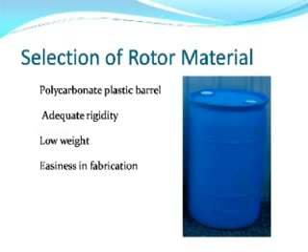The working principle of my project is the Magnus effect, which means that a rotor, a round cylinder, is rotated in a medium; here the medium is wind. One side of the cylinder assists the flow of the wind, so there the velocity increases. As a result, the pressure decreases, which depends upon Bernoulli's principle.

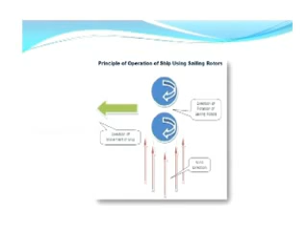On the other side, the velocity decreases because the rotation of the cylinder acts as a hindrance to the motion of the wind. So there the velocity decreases, and as a result the pressure increases. So a pressure difference is created on the two sides of the cylinder, and a lift force is generated due to this pressure difference. This lift force tries to move the boat, which increases the speed of the boat.

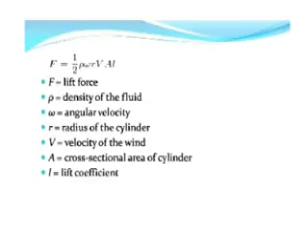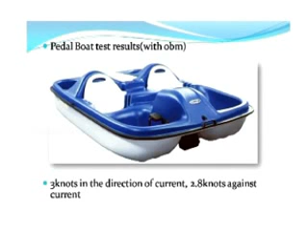We kept two or three selection criteria for the hull. First is the stability of the hull, second is the hydrodynamic shape of the hull, and third is the resistance due to the hull. For the pedal boat, which we selected first, one advantage is that it has good stability due to the waterplane area. The disadvantages are that its freeboard is very less, and the hydrodynamic shape of this pedal boat is against our design criteria.

So we went for another boat, an FRP fishing boat, a fiber reinforced plastic fishing boat. From the tests conducted on this FRP boat, we found that it is very suitable for our project because it has very good hydrodynamic characteristics. Also the stability of this FRP boat is very good. So we selected this as our hull.

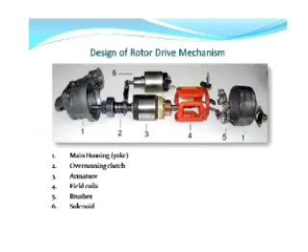The second one is the design of our rotor. It mainly consists of various dimensions of the rotor, that is the length of the rotor, the diameter of the rotor, and the speed of rotation needed for the generation of this lift force. From the various calculations, we obtained the length of the rotor as 3 meters, the diameter as 0.3 meters, and the rotational speed is around 650 rpm.

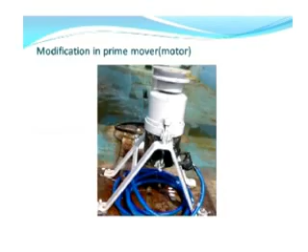In order to rotate this rotor, we selected the prime mover as a DC series motor. It has various advantages like very high starting torque, which is one of the most important characteristics of a DC series motor. We also selected this DC motor because we can reverse the rotation of the rotor.

If wind is blowing from one side, we rotate it in one direction, and if the wind is blowing from the other direction, we can reverse the rotation so that the lift is in the same direction. So we got higher maneuverability for this boat.

The merits associated with Blue Wasp, our project, are reduced fuel consumption, better utilization of wind energy than sails, reduced emission of greenhouse gases, better maneuverability achieved by using the Flettner rotors, and a larger angle of the wind can be utilized.

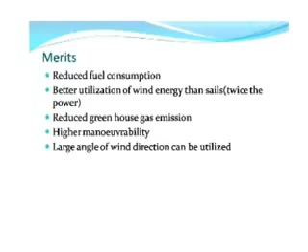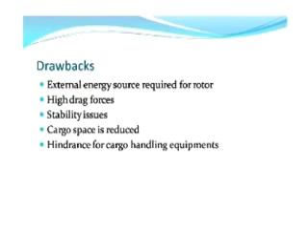If these Flettner rotors are implemented in ships, certain drawbacks are there. The main thing is the stability issues concerned, and also the cargo spaces are reduced when we implement such a large rotor onto the ship.

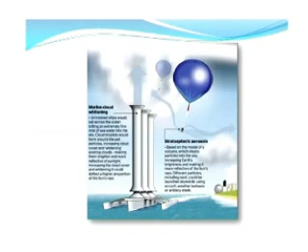A future concept associated with the project is known as the cloud albedo method. In this concept, if we made certain modifications to our project, we can spray water droplets into the atmosphere so that a cloud can be made. Since the droplets are very fine, the whitish appearance of the cloud can be increased so that the sun's rays can be reflected back, so that the greenhouse effect can be reduced.